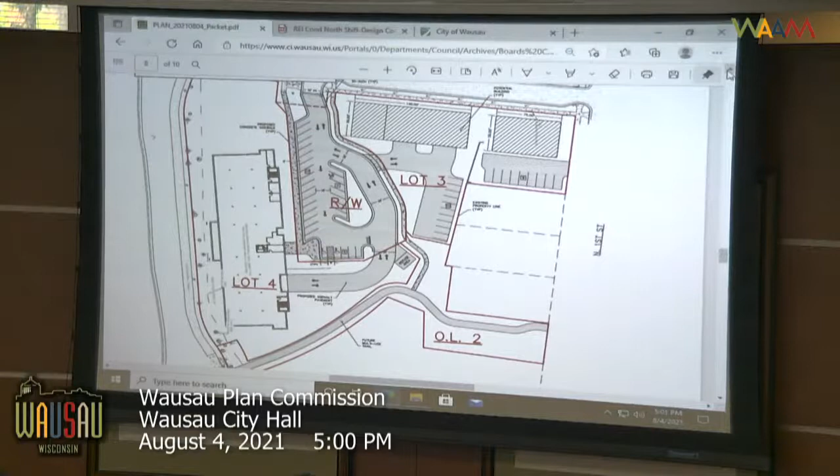After his phase one completion here, so we're coming to you with a condo development, and I'm sure Brad can probably give the overview with the images. I am here to help answer questions as we need to, and just wanted to make myself available. Sure, maybe I'll kick it over to you, Brad, and you can give us a little spiel.

Yeah, thanks. Let me see if I can get close to the mic here. And Sam wrote the staff report, so I'm going to steal some of his words, I guess. But so what's on the screen now is the previous general development plan for this area.

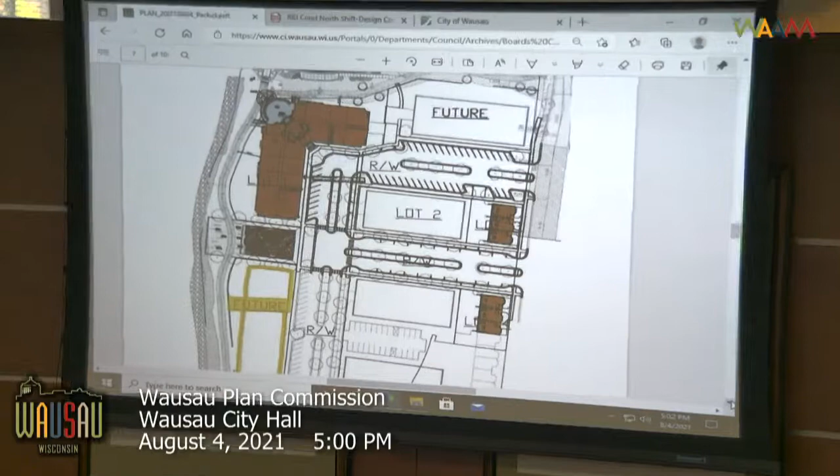It shows the phase one, the River Life apartments that have been built already. That's lot one on this map. As part of phase one, we had reached agreements with the developer to do a phase two, which was a residential project south of this building. We hadn't really amended the zoning until now because we didn't have specifics on what that project would look like. Before, this plan just showed future development.

Actually, the streets and parking lots have changed since then on phase one. But now we're in phase two and looking to get the zoning straight for the phase two condo project. So we're just setting the use, first of all, again, that wasn't really established before. It just said future use from a zoning perspective. Again, this was agreed to in a developer agreement, but not from a zoning perspective.

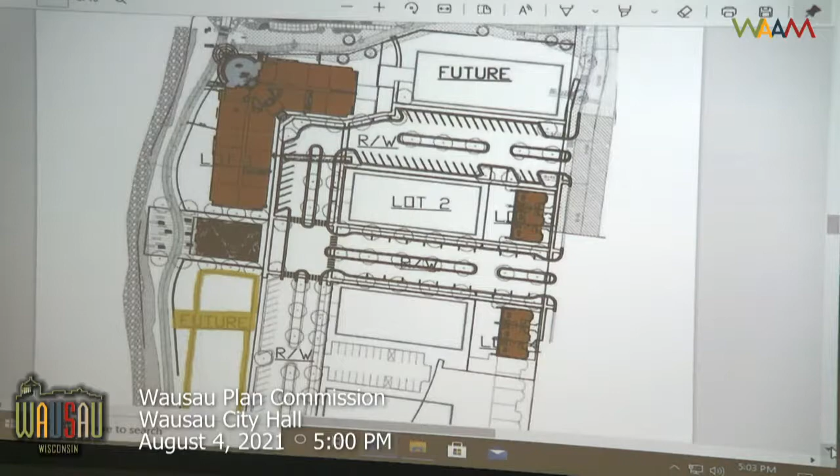So the general plan that's on the agenda tonight is to set the use, the general site plan for the area, the density of the development, and things of that nature. They'll have to come back with a specific plan that has more details that we'd like to see, but just from a general perspective, we feel they have enough here for us to weigh in on to send to City Council for them to approve the general plans, knowing that they'll come back with more detailed plans.

So this rendering is the site plan as originally drawn up. Again, it's a condominium building. There's some building elevations we can look at later, but it's on the river, parallel with the river and the trail. It's in that same area that had been identified previously. It is a 3-story building with underground parking, and they'd be looking at lot 4.

We'd be creating this new lot right now. It's basically just one big lot down there, so we'll have to divide this up, and they would get just the property that the building and the ramp and their refuse container is on. We'd maintain the right-of-way for parking and access to the building, again, as part of the agreement and what we had done previously with the River Life Apartments.

So that's kind of where we are now. Again, there's more details to be worked out. The building may shift slightly, but we can address that when they come back with the specific plans. We're working with a water main in that area that we don't necessarily want to build on top of, so they've already looked at maybe shifting the building north.

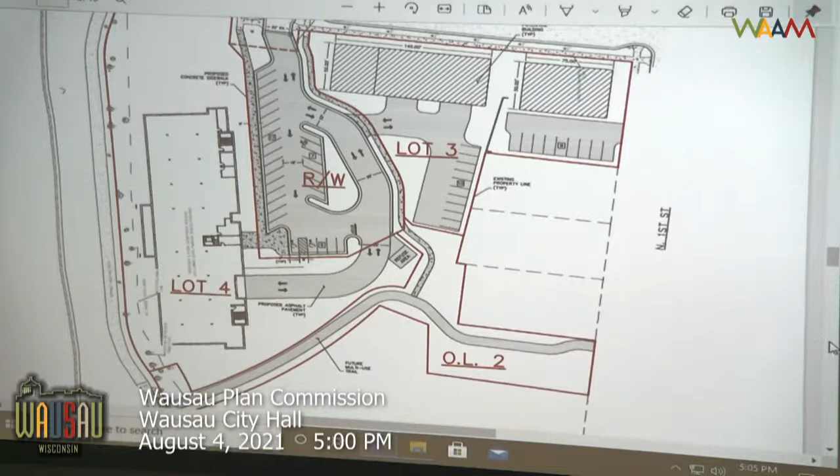That shouldn't affect much other than the placement of the building. The density, the use, the building elevations, everything is pretty much going to stay the way it is drawn here. The driveway access will be a little different, but we're still working out those details. In the packet, there are building elevations, again 3 stories above ground, 1 level of parking below ground.

The amount of parking we feel is accurate for what they would need from a zoning perspective, and it's not too much necessarily. It's certainly sufficient, so it's flexible. Again, we're maintaining as the city the right-of-way or the parking lot area, so if we feel it's too much, we can cut back. If we feel it's not enough, we can add to it. This is sort of a little bit in flux right now, but the flexibility is there for us to either add or subtract some of the parking on the outside. The inside stuff is pretty much set.

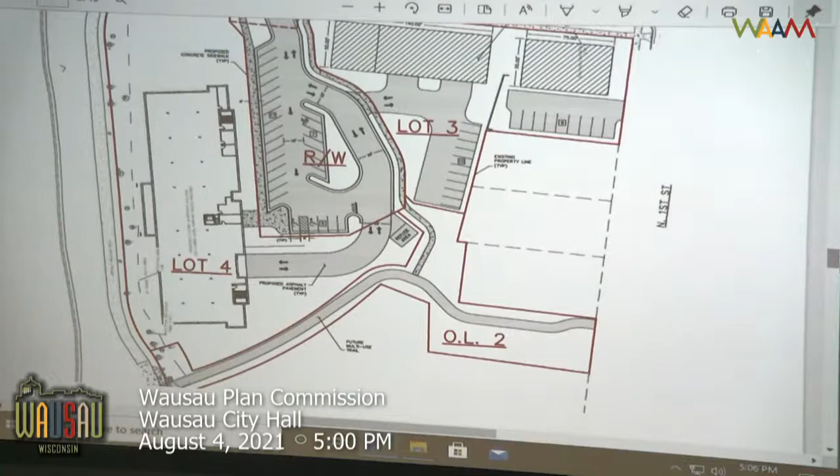I don't know, did I miss anything that you wanted to cover? Sam did go through the criteria for approval. I think he did a pretty good job of laying that out, and I feel at this stage that it's kind of what we expected all along. It's in line with that, and we'll continue to work with them on more details.

I was just going to add, I think the developer mentioned that when you purchase a condo at this level, the expectation is that you get 2 parking spots, and this does allow for that, plus additional parking for people who are just parking along the river for the day.

Cool, thank you. All right, so before we start talking, I will open up the public hearing for this. Public hearing is now open. If anybody would like to make any comments about this general development plan, you can approach the podium, and you'll get 3 minutes.

I'll ask for a second time if anybody's interested—I'm laughing because there's nobody here, but I'm still going to ask 3 times if anybody would like to approach the podium and give us any information on this general development plan at 920 North First Street. All right, last time before we close this public hearing, if anybody would like to talk about this general development plan. All right, public hearing is closed.

It's now on us. Maybe before we start talking, if there are questions, we can ask those. Otherwise, I would entertain a motion. I have a motion by Bergman to accept this general development plan. Second, by Bohlken. Any discussion?

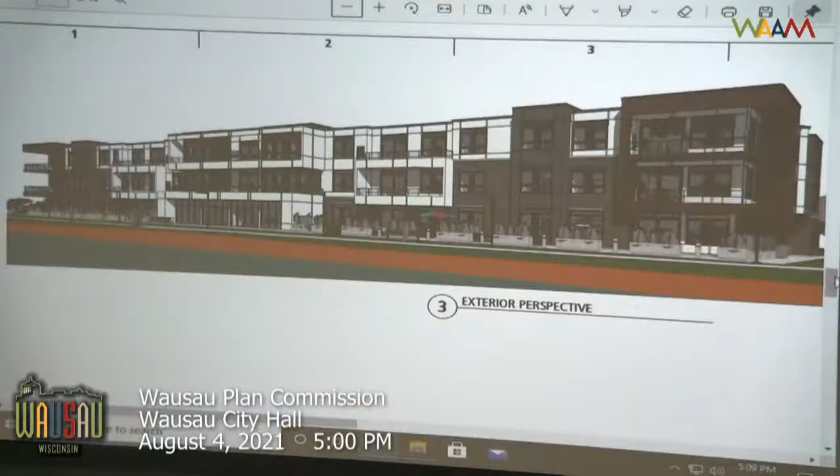I can certainly answer that. Right now, not every unit has the ability to view the river. We do have east and west-facing units, but we also focused on the corner units. So you've got the southwest corner, northwest corner. That southeast corner will have some visibility, as well as the northeast corner. So there's just a few that are kind of in the center of the east elevation that would not have a direct view. Okay, thank you.

I don't think that would have any bearing on our approval of it. Just curious. Second question is probably for staff.

On page 3 of the packet, under figure 1, illustrative concept from the 2015 plan, there's a line that says subdividing the property now rather than waiting for future development assists this property in closing the site's brownfield requirements, allowing for condominium units to be sold. I'm wondering if we could get an explanation of closing the brownfield requirements—is that for the entire River Life area, or just for that property, and what does it mean when you close the requirements?

So this is a former brownfield site. The DNR sites, the brownfield sites, are different than where the property lines were changed. The developer was looking to parcel off just that portion of the site for their building, so that they would assume the environmental liability just for their building, not for the whole site, which would include property that's outside their site. Otherwise the DNR would look at it as previously being one big site, essentially. It was called the Hammer Blow property, and that was remediated to a certain extent, but not necessarily completely closed out, because that closure happens when things are redeveloped and put back into a permanent state.

So this is dividing the property so that they're responsible for their lots, the city's responsible for our lots, and a future developer would just be responsible for theirs, versus if it wasn't subdivided like this, they may be responsible for property that's not necessarily theirs. So that's just the building footprint then? Well, this lot 4 is kind of L-shaped, so it's this red line here, which would include the building, the ramp that goes down into the parking, and the dumpster area.

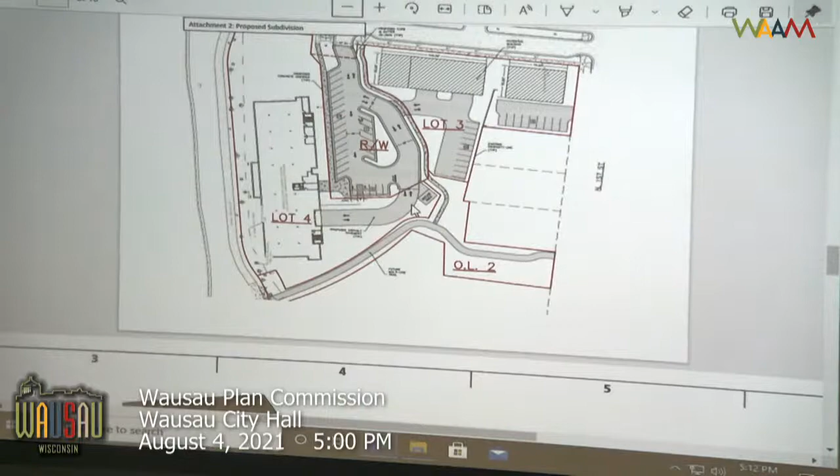In River Life, in the first apartment development, there was some discussion. The ramp is actually on city property, and there was some back and forth about whether the city is maintaining that. The city doesn't necessarily want to be maintaining someone's private driveway. That's not necessarily good for us or them, so we're okay with giving them that so they can maintain their own driveway and keep their dumpster on their property, versus moving it onto city property.

When this building is complete and people begin to occupy it, all of the brownfield requirements the DNR has for us, or whoever owns it, will be satisfied. They will work with the DNR directly to make sure they're doing things that satisfy the DNR in terms of a cap management plan, I guess they call it.

Any other questions or comments? Just a couple of little things. So this isn't really First Street anymore, right? Isn't this like River Drive or North River? I think it turns to River Drive right at Fulton, on the north. So it's First Street to the south of Fulton, and River Drive to the north of Fulton.

Regarding parking, there's at the very least a 2-to-1 ratio of cars to apartments, so there's extra parking available for public use. This is different than Phase 1, right? Because that parking lot is, I don't know what the ratio is, but that's all designated for River Life Apartments. Correct. And the ratio is a little different because some of these units have more 3-bedroom units, so you're allowed more parking for 3 bedrooms than for 2 or less.

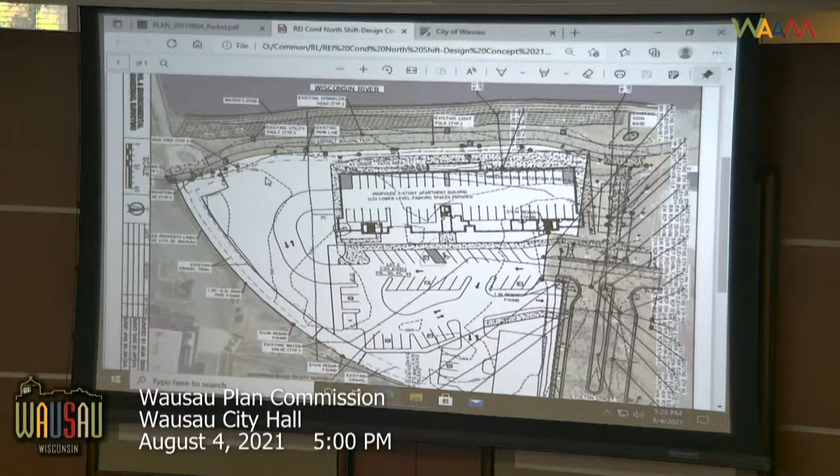We've talked openly about that, and with the building shifted to the north, you actually get a nice intersection of the bridge that crosses the river and the river walk, and then the radius that goes to the east, and it ends up being kind of a nice node of where something like that could still take place on the south. I know parking wouldn't be quite as convenient there, but it could just be kind of a nice activity node for a music venue or something informal like that to happen there.

Going back to the site plan, so we are looking at building on Outlot 2, there's a trail that would follow the old railroad tracks right from the bridge to Barker Stewart Island, and then turn and go straight out to First Street. That's kind of a new node that would be created there with the bridge and the trails. So that's a different spot, but I think there are advantages. We're looking at putting the old stone mill building on Barker Stewart Island, that would be just across the river from there, so there are some synergies there potentially too.

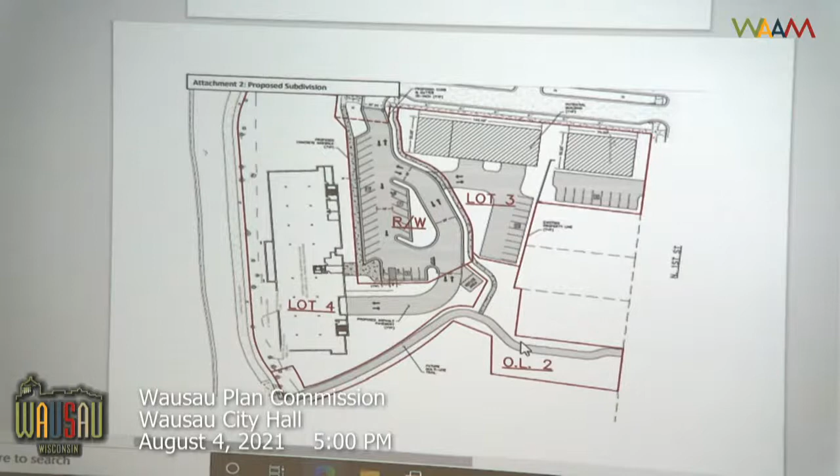Any other comments or questions? I am not seeing any, so I think we are ready to vote. All those in favor of amending the general development plan at 920 North First Street to allow for a 3-story, 32-unit multifamily residential building in a planned unit development zoning district can signify by saying aye. Aye. Any opposed? All right, that passes unanimously and will be at council next week, 8:10.